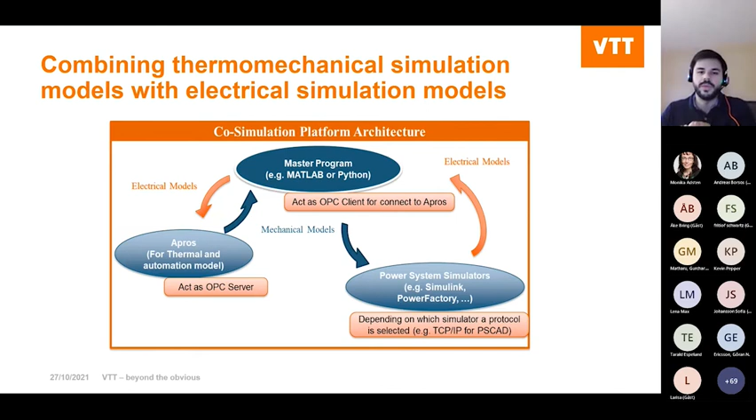So yeah, the main goal here is to establish this communication and data exchange between the simulations that occur in two different softwares. This master file, as I mentioned, was developed in MATLAB, but there are future plans to take it to an open source language, such as Python or C, in order to make it as accessible as possible. And we also want to support different electrical simulation tools.

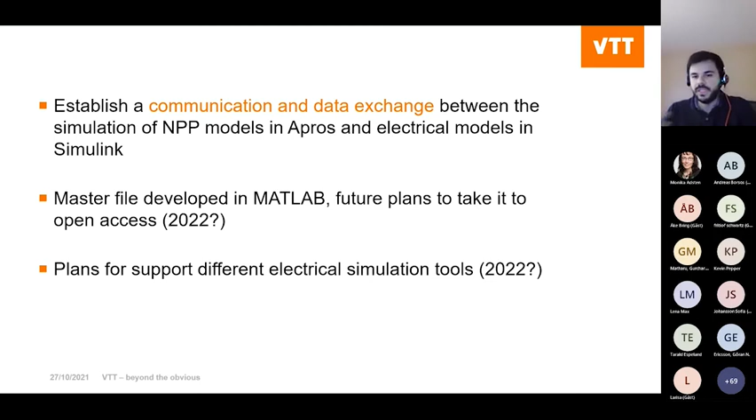So modeling the nuclear power plant operations in APROS, but also including the on-site and off-site, perhaps transmission systems in PSCAD or PowerFactory, PSS/E or something like that. It depends on the feasibility of integrating these simulation tools. So we want to link two simulations for a more complete overview of nuclear power operations and safety assessment.

And since I'm Brazilian, it's pretty much mandatory that I make some sort of football analogy at some point in this presentation. The operation in the COSI platform is similar to a midfielder. We just get the ball from the defense and pass it to the attack. Nothing fancy. We don't do any tricks, but we just ensure a proper link between the two stars of our team, which are the thermomechanical and the electrical simulation sides.

And plugging in those models is one of the most important aspects that we have. We typically use already existing models developed in those platforms. The nuclear power plant models modeled in APROS were supplied by our partners in our steering group. The on-site grid models were also supplied by our partners and modeled in Simulink.

And the offsite grid models were initially considered as Thevenin equivalents of the transmission system, but we identified the need for the development of a more robust model ourselves. So that is also something very interesting and rather important that we have been developing in the COSI project.

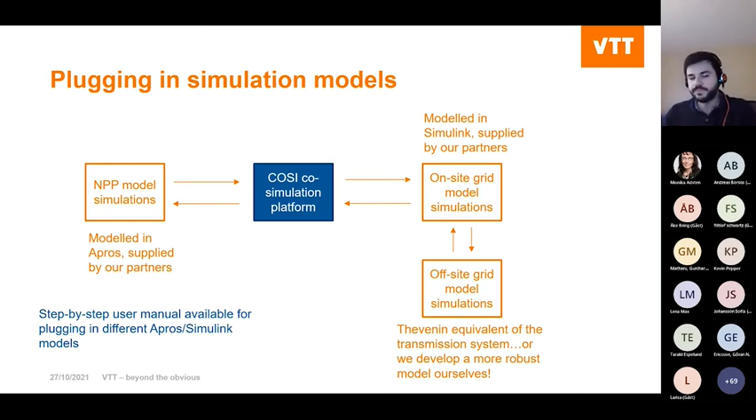As I was mentioning, the transmission system model that we have been developing ourselves with a lot of support from Fingrid, we transferred from a Thevenin equivalent of the transmission system towards an 8-node model, and later on towards a 50-node model for the Finnish grid. This work has been done by Aalto University, our partners in the COSI project, and it's been a really excellent effort by our partners.

This transmission system model is an extremely useful, let's say, byproduct of this COSI project. It was not our main goal, but since it was identified that we would need such a model to effectively have more accurate co-simulations, those efforts have been really justified, and we have been able to produce very good results with the transmission system models.

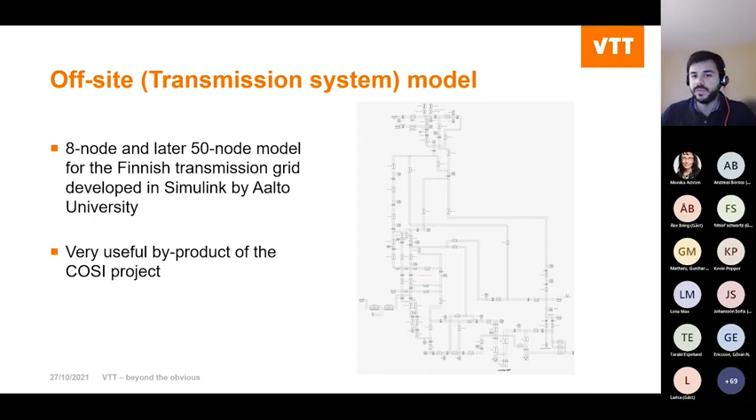So testing this platform through those fault-based studies was our main goal for this year. As I mentioned before, the project has been going on since 2019, where we defined and implemented this platform architecture. In 2020, we tested this co-simulation platform architecture and performed the first tests with basic models.

And in 2021, we really dug deep into it and implemented some very large nuclear power plant models. We upped the scale of the models that we are using in the platform, and really performed some stress tests on our architecture to notice that it did pass those tests.

The communication between the two simulations has been working as we expected. The plans for 2022 are to perform other types of studies, so looking at different future grid scenarios, which is also quite linked to some of the presentations that we had today in this workshop. And we also want to develop this open source platform for increasing the extent of people that we can reach with the platform.

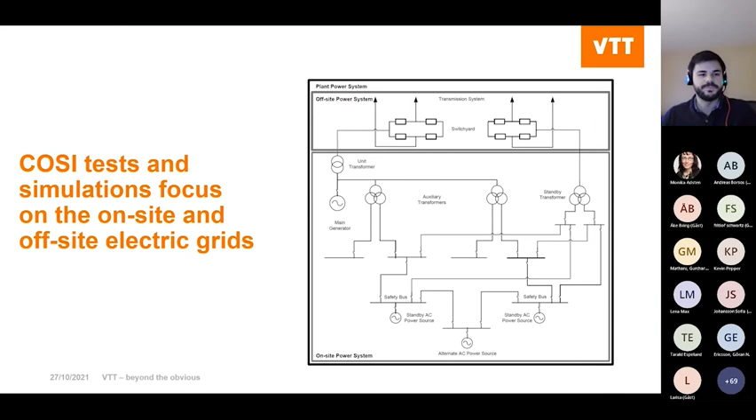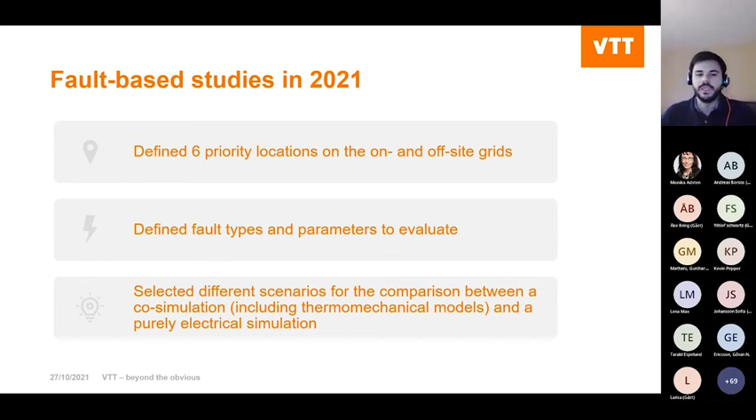So for the fault-based studies in 2021, we have defined 6 priority locations, both on the on and off-site grids. We defined which fault types and which parameters to evaluate, and we selected different fault scenarios for comparing between a co-simulation and a purely electrical simulation. In that way, we were able to evaluate what was the benefit of a co-simulation model in different scenarios. For those fault scenarios that were implemented, we used a basic, generic on-site grid with some locations specified.

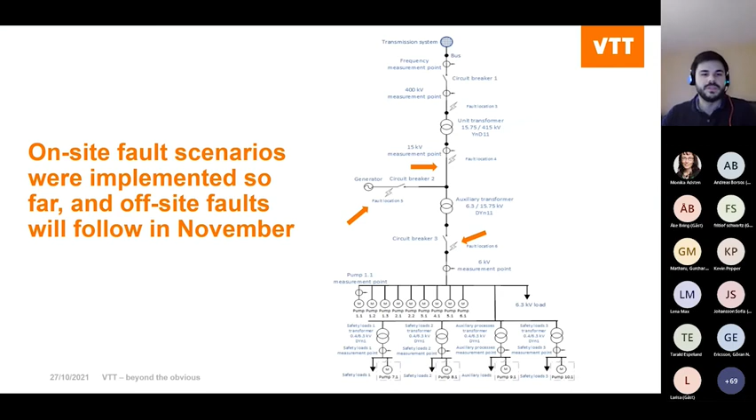The fault scenarios were a 3-phase short circuit at the low voltage side of the unit transformer, the same type of fault at the low voltage side of the auxiliary transformer, and also open phase conditions at the output of the main generator and at the low voltage side of the auxiliary transformer. And we were able to evaluate what kinds of effects those fault scenarios had on the generator output, for example, or the pump behaviors in this basic nuclear power plant model.

Just as examples here, I will not go into too many details of how those faults were simulated or the behavior that we observed. Just some comments on the benefits that we identified from the co-simulation compared to the simulation. We evaluated the main generator active power output for a short circuit lasting 250 milliseconds, so a longer fault than the required clearing time. In that case, the protection system has failed to clear the fault at the required time for any particular reason. And we noticed that the purely electrical simulation, which is the blue line here in the plot, recovers quite quickly, whereas the co-simulation considers the instability also in the automation control and the thermomechanical processes in the nuclear power plant, and has a slight delay on recovering properly.

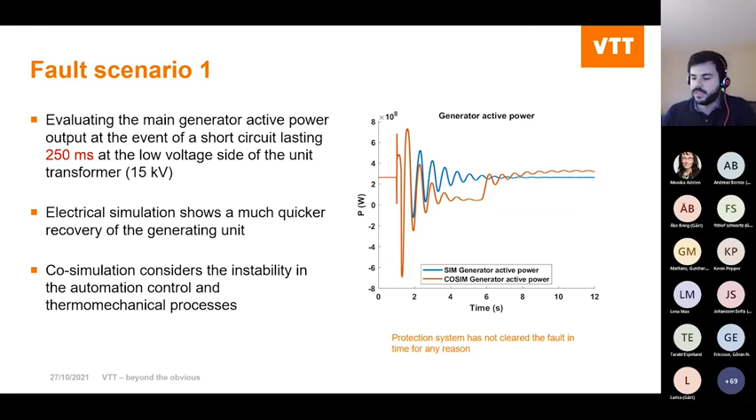This behavior was not observed in faults that were cleared within the regulation time, so less than 200 milliseconds of fault duration. Both curves behave exactly the same, but once the protection systems fail for any reason, we do see the benefit of the co-simulation. So that is one thing to keep in mind from our presentation.

Similarly, we can also observe the behavior of the torque in one specific pump at the nuclear power plant. With an open phase condition at the main generator output, with a purely electrical simulation, the torque stabilizes after that fault, whereas in the co-simulation, it shows that the torque keeps falling well after that fault has been cleared. So the inclusion of those constant updates that come from the APROS side to the electrical simulation really produces very different behaviors, and gives perhaps a better overview of the expected behavior of different components in the nuclear power plant operation.

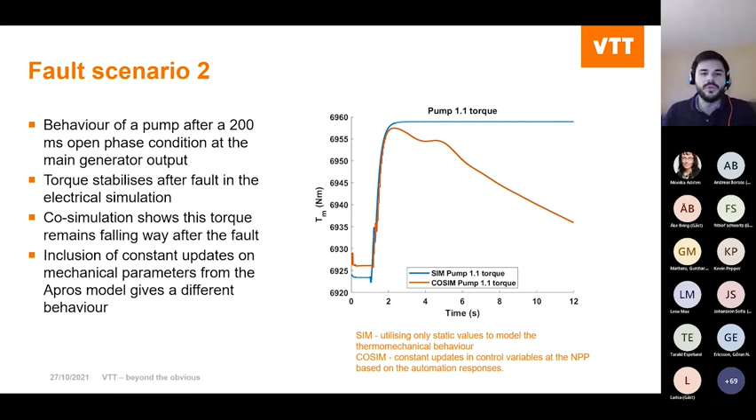So yeah, what sort of benefits does co-simulation bring? Because performing a co-simulation, it is indeed more computationally expensive. It does take a little bit longer because you are indeed running two different simulations at the same time. So it has to bring some sort of benefit. And this benefit doesn't come in every single case. So it is important to notice which cases do benefit from that.

So one specific case in which co-simulation does indeed produce benefits, and the use of this sort of platform is warranted, is to analyze border cases when the protection systems do not work or they do not clear the faults at the designated regulation times.

Also, the modifiable time steps that we have in our platform allow for transient analysis in electrical systems caused by disturbances from the mechanical side, and also the possibility to plug and play, quote unquote, ready-made simulation models to evaluate the different impacts is also rather beneficial.

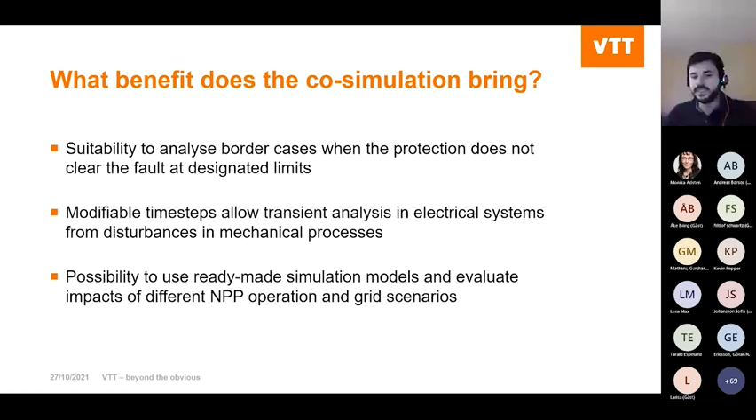So instead of utilizing a generic model for a transmission system or on-site grid or a nuclear power plant, we can indeed evaluate the specific impacts of grid faults on that specific nuclear power plant, for example. So it brings a bit more information about the safety and safety assessment of that nuclear power plant.

And the platform has many other possibilities. So it shows a lot of potential for different use cases. It was developed so that we can analyze the behavior of any different entity in the nuclear power plant, in the on-site grid and in the off-site grid. So the plots that we obtain are very easy to modify, and which variables will be plotted, which variables would be considered, is fairly simple for the users to define themselves.

Different fault scenarios, such as the very interesting presentation that we had previously for EMP cases, for example, can also be implemented in the Simulink models to produce the impacts and behaviors in the APROS side, in the thermomechanical side. So the possibilities really are rather endless there on different fault scenarios that we can test.

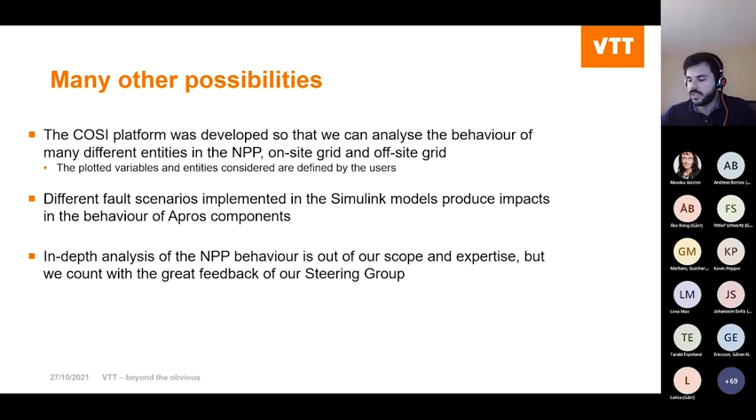And the in-depth analysis of this nuclear power plant behavior is somewhat out of the scope of this project itself. We want to focus on creating a functioning platform, but we have been counting on some excellent feedback from our steering group, and we are able to really evaluate whether those faults are impactful or not, and that has also been another interesting result from the project.

So yeah, just to conclude and list some of the next steps, so to watch this space in a sense. The development of the project continues, and we have identified that, of course, the better and more detailed models we have, the better the results output from the co-simulation, which is a fairly obvious conclusion, of course. Since we are not simulating anything ourselves, we are counting on the simulation in the APROS and the Simulink models. So more robust and more detailed models in each of those software naturally produce better results.

This co-simulation platform can be a very interesting resource for designing and modeling the protection and backup systems, specifically at the on-site grid. So it provides some valuable feedback on that specific aspect of nuclear power plant safety assessment. And yeah, we have identified in these fault-based studies that perhaps fast faults or fast clearing faults may not be the best use case for the co-simulations. So perhaps just electrical simulations are indeed already enough in that aspect.

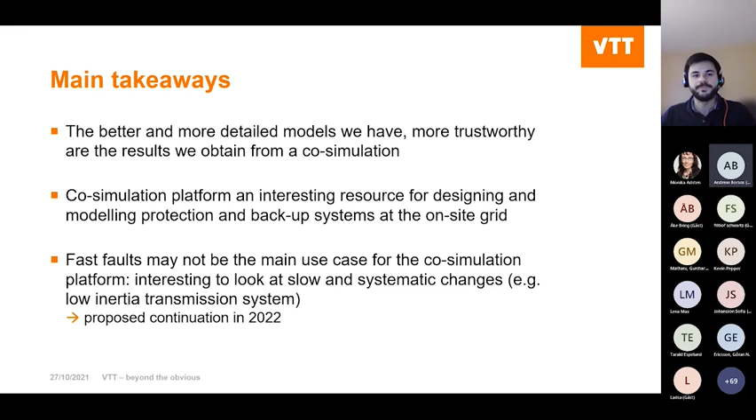And yeah, so we are still a long way from a complete and final tool, but it is now at a very usable state, and we are very confident that it is working as intended, so to say. The communication between the two simulation platforms is working well, even with large models, and the possibility to add new electrical simulation softwares and to transfer this platform to open source is a very promising potential to improve our reach.

So yeah, with that we close saying that we greatly welcome feedback. We greatly welcome the interaction with industry experts to tell us what sort of aspects you would need in such a platform, whether you think that we are on the right path or not.

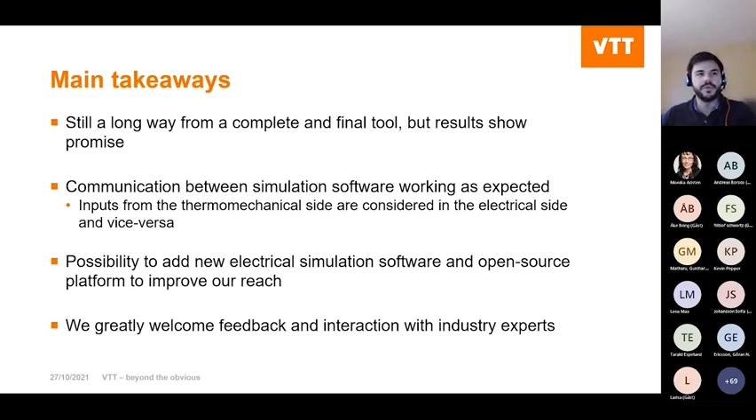And while you do that, I would like to ask you, Sergio, would it in any way be possible to compare the simulation to a real case with data from a plant? Yeah, that's a very good question, actually. I think that since we are always dealing with data vectors in those types of simulations, it would be very well possible to compare actual fault measurements with the results that we have.

Unfortunately, we don't have access to those types of data in this year of the project, but for the continuation work, we have indeed proposed that this could be one thing that we would look at to really validate our results against real world data. Yes, and hopefully that would also further enhance the importance of having the co-simulation. Yes, absolutely. We do hope for it.